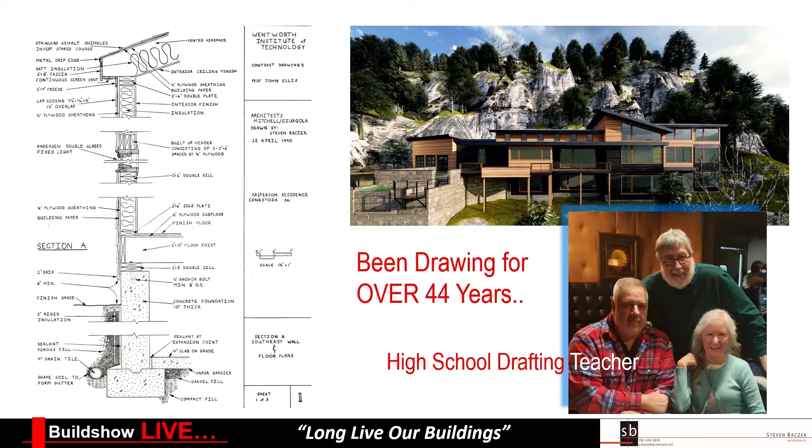So the picture with the 3 people, me being one of them, the gentleman behind me with the glasses on was my drafting teacher in high school. I still have dinner with him once or twice a year. We talk about it, he watches all my videos, he reads the articles, I'll send him a magazine or a link every now and then, but we chat rather regularly. I think it's really important to maintain those links for a number of reasons. He wants to understand what his success is also, right? So by me sharing that information with him, he gets a really quick understanding of who he was and what he did.

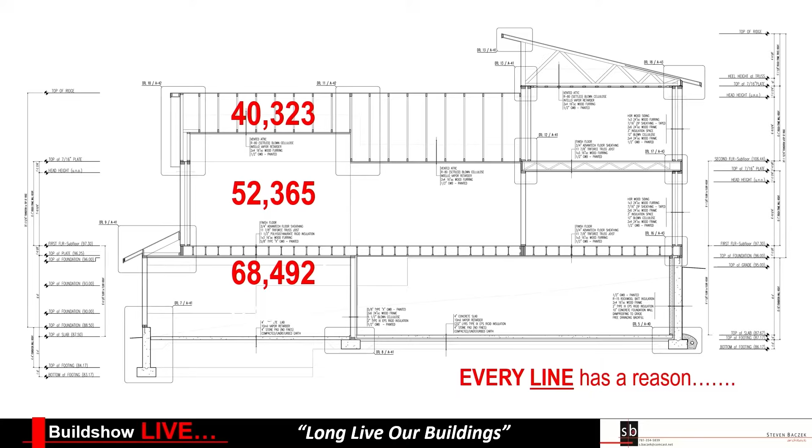Set of drawings - maybe you know it, maybe you don't, but I took 3 projects we're currently working on, did a global grab, and did a count. So 40,000, 52, 68 - those are the number of lines in a drawing set. It's a lot of lines, right? And every line has a reason for being. So as an architect, I certainly need to understand what every line means, but as a builder, you're charged with interpreting what every line means. So our success is only achieved if we both understand what all those lines mean.

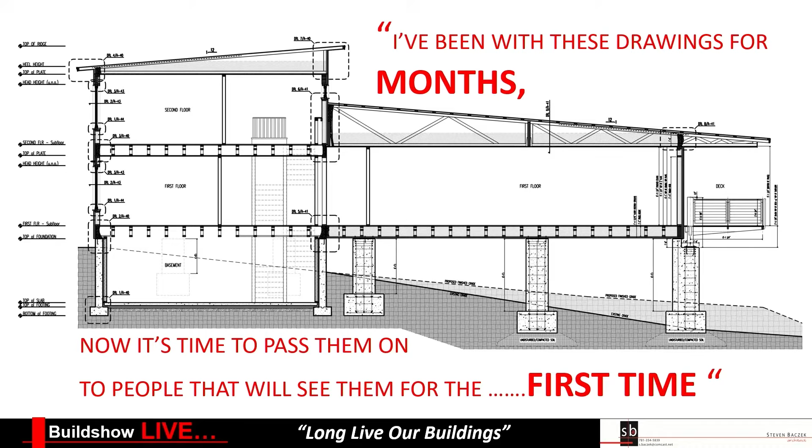One of the things I always have to remind myself is, yeah, I've been with these drawings for a long time. There are drawing sets that, if you ask me the width on that bedroom, I could probably tell you without referencing the drawings, because I was with them for so long. But we hand those out sometimes, not necessarily to the builder, because we love to get the builder on board early, but sometimes the framer's looking at it for the very first time. So we have to make sure the right information is there, so that not only am I putting myself in a position to succeed, but I'm trying to put the framer in a position to succeed, and I'm planting that seed.

And remember, you are responsible. His success is partially my responsibility to provide the right information for him to do his job successfully.

As an architect, one of my favorite things to do is visit the job site. I know that's crazy for an architect, and believe me, I can play games with the best of them out there.

I walked up to a job site where the concrete guy, the foundation guy, was leaning on the fence. I said, hey, how you doing? He said, oh, good. I asked, how'd the foundation go? Everything lay out okay? He said, yeah, it's fine. After a couple seconds, he looked up and said, what are you, the framer?

This is where I had to have some fun. I said no, and just stared at the foundation. He goes, oh, you must be the plumber. I said no. He said, well, are you the excavator? I said no. He said, all right, who the hell are you? I said, I'm the architect. He said, really? Why are you here?

Architects, we get that a lot. But I can't do my job well if I don't know what everybody's job is out there.

So I'll climb up on a roof, sit down, and talk to the framer. Hey, did everything lay out properly? Was all the information you needed there? How do I provide a set of drawings as an architect if I never visit a site and never have a conversation with a concrete guy? How do I know what the hell he needs?

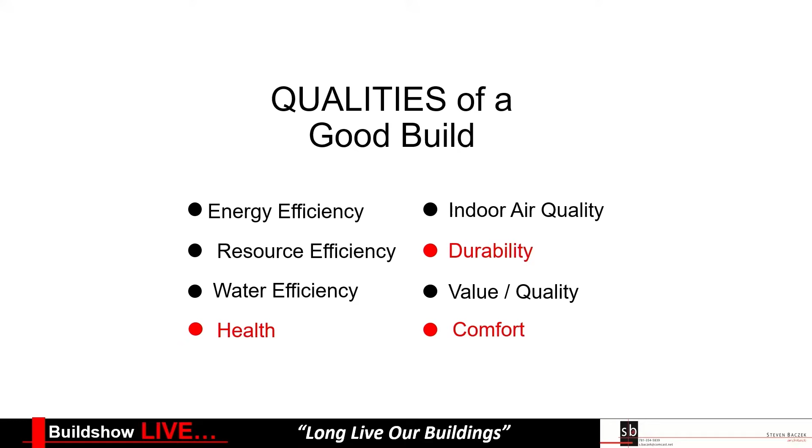So they understand those things. Our job is to find that sweet spot, right? As professionals, how do we get them in that range?

Labels—I hate labels, you can get rid of them for all I care. One of the labels I hate the most is high performance homes, and that's kind of one of the things we specialize in, but I rarely use that term. For me, every home is just a series of decisions. Every home has a budget, and my job as a professional is to marry their budget with good decisions. That's it. If you want to call it a passive house or LEED Platinum or zero energy, go ahead, that's fine. But my job as an architect is to take that budget, marry it with sound decisions, and put the best product on the ground that I can.

In my work, I have the privilege of working with some really interesting people. One gentleman I worked with—we were building a second home that would eventually become his final retirement home and family home. Jay happened to be in charge of entrepreneurship, the College of Entrepreneurship and Innovation for a very prestigious college in New England. Jay spends his time going around the world, when he's not teaching, talking to companies and countries about things like how do I scale.

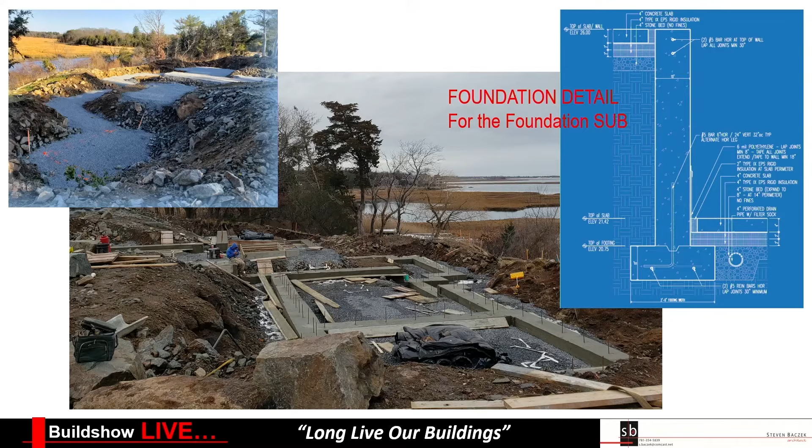And yes, it scared the hell out of me because foundation systems, as you know, we get one chance to get it right. And so we did our typical detail there, and you can see here all the different plateaus of that foundation system.

But because fear is such a great motivator, I said, you know what, let me take the extra step. I'm going to build a 3D model of the drawing. I'm going to build that foundation before we build that foundation, and make sure I thoroughly understand it. Because again, when I look in the mirror in the morning, you are responsible.

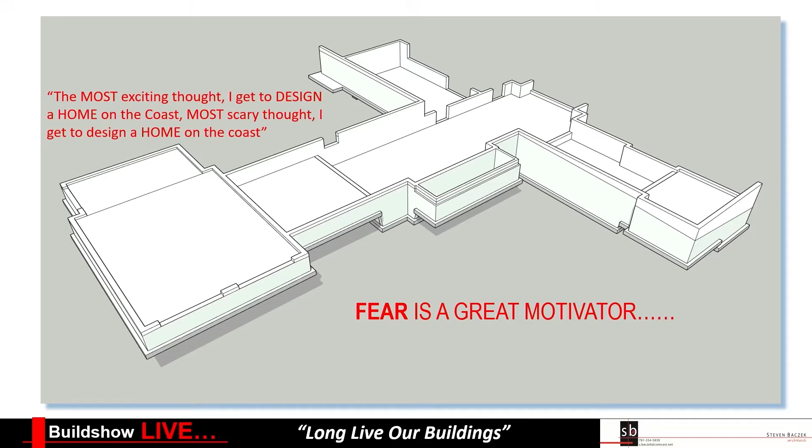When Brian calls me, the 3 words I never want to tell Brian is 'I don't know.' It might be 'I don't have that answer, I'll go find out,' but it's never 'I don't know.' So I built the whole model of this. I understood where all the steps were, where everything went, transferred all of that information into the foundation plan, and you can see that's a blow up of this, with all the little different elevation marks.

One of the things I learned from a concrete guy years ago was, he asked, can you put diagonals on a foundation plan? I said yeah, that literally is 2 clicks and stretch the line on. He said whenever you do foundation plans, put that on there. We could do the math and figure it out, but it's great to have those diagonals to check our square on the foundation, because my number's gonna be within a 32nd, since that's what our tolerances are set up for. So we could provide that number. It helps him become more successful because not only is he doing his job, but he can check it against another number to ensure we're all on the same page.

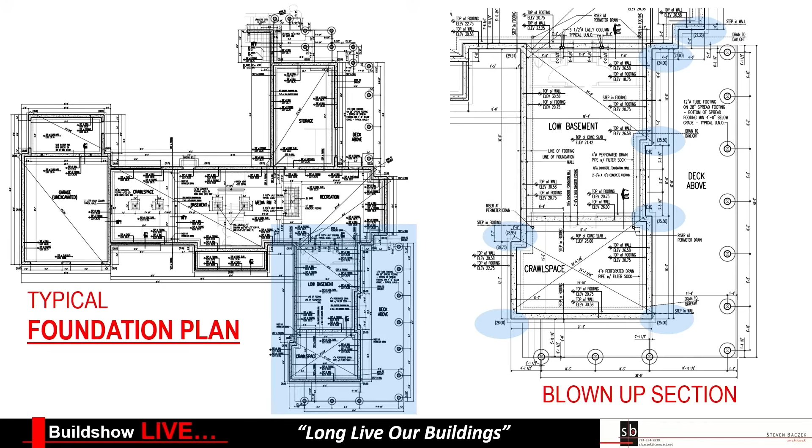And if he puts in a nice square foundation, guess who looks good in front of Brian? So success breeds success. We put all these numbers, but then I got thinking, I built this model, why don't I help Brian out even further? So I created a whole package of 11 by 17 sheets because I already had the information.

I did this so I understood it, but now let me share that information with Brian. I gave him all of the foundation elevations with all the grades, 25, 25.5, 25.5, those are all dialed into the foundation plan, but it also shows what's above grade, what's below grade, and what the heights are of each of those grades at the corners above the footing.

So guess what Brian did? He absolutely loved it. When he built it, he went over there, measured up 4'3", sprayed green on that corner, snapped the line and sprayed green. So not only is Brian now successful, the waterproofing guy's successful too, because how easy of a job is it? 8,000 square foot house, you tell the waterproofing guy, I just sprayed all the green lines, just go and waterproof to the green line.

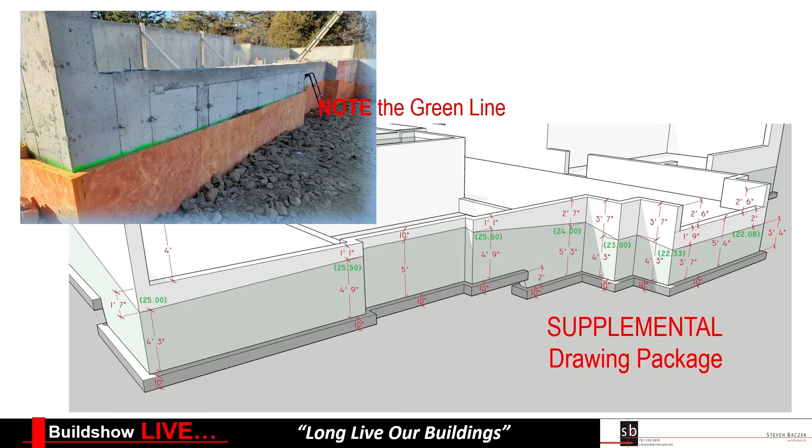Coordination is spot on in that system. Everybody's successful because I chose to make sure I knew what the hell was going on in step 1, and then shared that information with everybody else to ensure success went down the line. And now that that's there, you just tell the excavator, hey, backfill that to about 2-3 inches above the insulation on the outside of the wall, and the excavator's done and happy.

Everybody that followed me from the drawings is happy because they all fully understood. The concrete guy was immensely thankful. He said this is the best foundation I ever put in, and it's one of the most complicated. But it was the easiest because someone took the time to figure it out. Someone took the time to do their job.

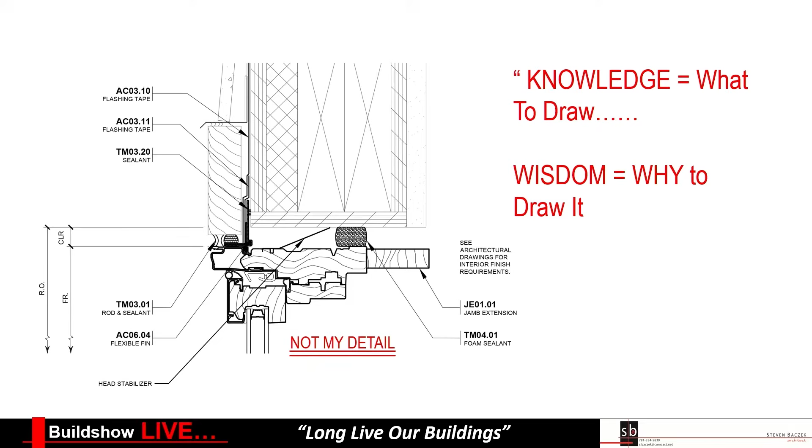Integration and application. A lot of times I hear people say, oh, we'll just wait till that gets framed up and we'll figure that out. You hear those stories with other builders saying the architect really didn't give us room for a mechanical room or mechanical space or duct space.

This is a small 1,500 square foot house. We put a Zehnder system in it. The Zehnder system had 285 linear feet of 3-inch hose. 1,500 square foot house, no basement. That is not a situation where you say, well, let's frame it up and we'll figure out where all 285 feet go, right? That's something we have to figure out at the beginning. So knowledge of what systems we're putting in that house, but also knowledge of where these systems are going to go. It's an integration process, not an application.

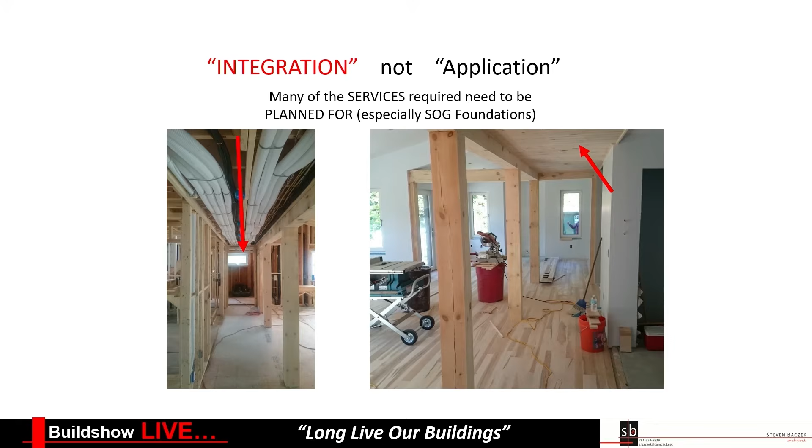It's not something we apply after the fact, because it's not going to happen. And the homeowners don't all of a sudden want to see a soffit running down the left side of their family room because you said, hey, we didn't really realize, but there's 8 3-inch hoses we got to get from over there to down there, so we're just going to put a soffit across the room. So we planned this out. We turned that little hallway there into the basement, basically, ran everything that had to traverse the building, and then we complemented it with a nice wood ceiling. We turned it into an architectural effect that was fully integrated with our mechanical systems.

Pre-construction meetings. I do a lot of work. Jim, the guy with the red hat, he's the first builder I ever worked with. Jim and I have been working together, and we have 2 new projects we're about to start. We've been working together for right around 30 years. Like I said, very first project, Jim and I never raised our voice at each other. We've never had an argument. We've never even had a frustrated talk. Jim's a real gentle guy, but Jim and I are always on the same page.

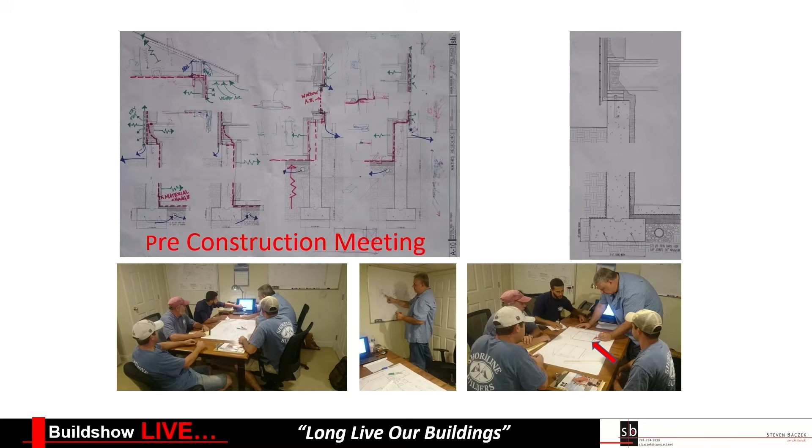I'll give credit to Jim. Jim ensures that we're always on the same page. I try to keep up to Jim, but Jim is relentless about, hey, let's just have a quick meeting, let's talk this through, I want to make sure we're on the same page. But then he doesn't have problems. When I show people this, and I say Jim brought in all his guys, and we walked through the drawings, I stripped all the notes off, we talked about where's the air barrier, where are the proper flashings we're going to put in, people say, well, doesn't that cost Jim money? He's got 4 guys in there for the afternoon, bought him pizza, all of that. Jim's response when I asked him that was, what's the cost to replace 6 windows that were installed wrong? Getting on board and understanding before you do the task is far easier than trying to fix that task gone wrong.

Details. For those of you that were here in 301, we talked a little bit about that, but for the longest time, an architect's job was to show the components of a wall system. Here's the 2x4, this is the floor frame, this is where it all goes, this is the wall, how it's going to set up, this is where the column is, engineered wood column, whatever the case is, how the siding goes. But in my 30 years, things have certainly migrated to where not only do we have to show components, but performance is a major part of what we're illustrating. Where's the air barrier?

How are we managing that water? What's the vapor profile across that wall system look like? Does it have the ability to dry in both directions or in one direction? Is there a problem where I have multiple vapor barriers and I'm going to create a diaper? Joe coined that term. The reason he calls it a diaper is because you know what happens in a diaper, it gets filled with you know what. It's the same with the wall system if it can't dry in at least one direction.

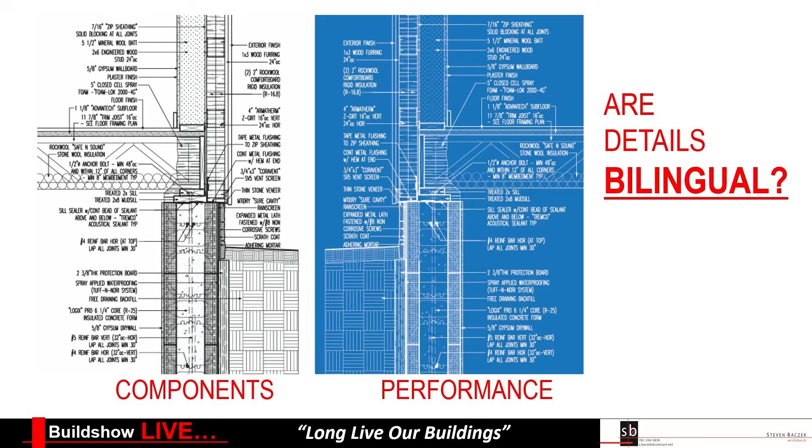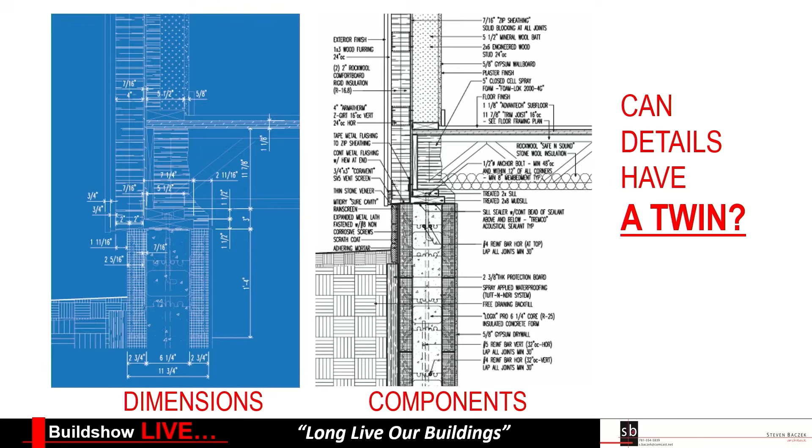Sometimes I do twins. Some builders really like it, there's a couple I work with that absolutely love it. We'll do the detail, put all the notes on, but then I'll provide them a detail that has nothing but every dimension available. They're certainly smart enough to put that together, but they just like that detail there so their guys can check the number, so their framer can check the number and make sure everything is going well. From a CAD standpoint, it's freezing a couple layers, thawing the dimension layer and turning off the text layer, it's not any additional drawing really.

It takes me maybe about 5 minutes to develop that drawing, but that's hours worth of potential savings and corrections for the framer and the general contractor, if we're talking about performance, and I know the framer is in charge of getting my air barrier correct.

Then I do a set of twins where I focus on what the air barrier is, because after all this stuff on the right gets installed, the framer's gone. He doesn't care that there's a crown molding here or a beadboard soffit or vent here, he's not putting that in. The siding guy that's coming is putting that in. To the framer, who cares after I leave?

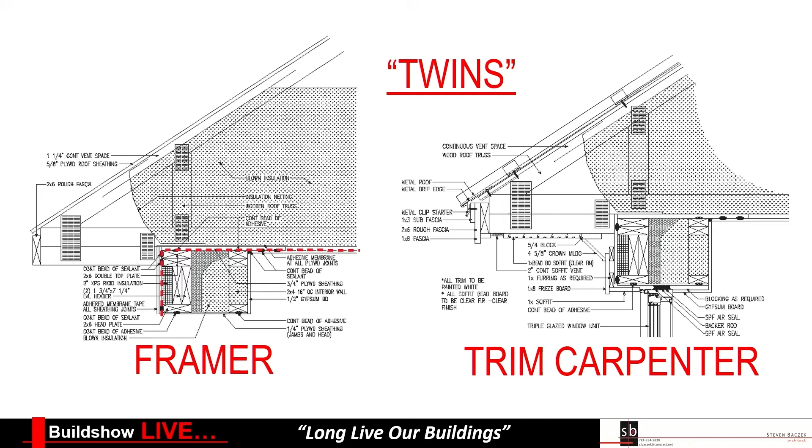But the framer does care about how we're transitioning that air barrier across and into the ceiling, where do I have beads of sealant, right? That information. So I create twins that are for each of the different disciplines so that they can be put in a position to succeed.

Design intent versus build. Now, all of our drawings, if we do trusses, yes, they get sent out, they get engineered, we get tons of shop drawings back, we get to review them, but how many people have ever sent plans to a truss manufacturer, come back with shop drawings and had no changes?

That world doesn't exist. They always come back and it's like, why is this truss 26 feet? The house is 24 feet. Oh yeah, we must have missed that. And I guess you did.

So what I like to do, and again, all of this stems from someone has to be in charge of the building, and I'll take that responsibility. Whether it's the truss manufacturer, the framer, the concrete guy, I'll take the responsibility of understanding the build from day one till the end of the project, and then I'll have those conversations in between with all the various disciplines.

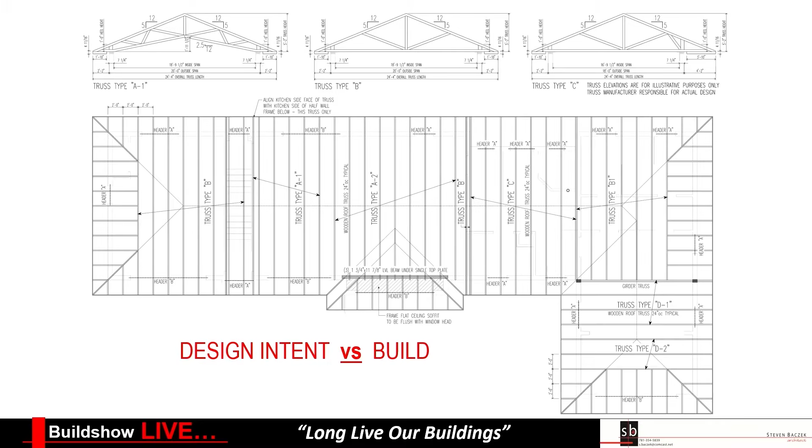So my conversation with the truss company is, I do the roof framing plan, I lay this out, but then I call out truss A1, A2, Bs, Cs, and then I'll just do some truss elevations. Now, I'm not engineering the truss, that's not my intent. My intent is to get them to understand what the overhang situation looks like, what the slope is, what I intend the height to be, and here's the bearing points of those various trusses and where they lay out in the building. I'm just giving them my design intent via a truss elevation.

So now they look like even more of a fool when they come back and this truss, instead of 24, is 26 feet. I say, I drew the elevation for you and it says 24 feet. How did we get there?

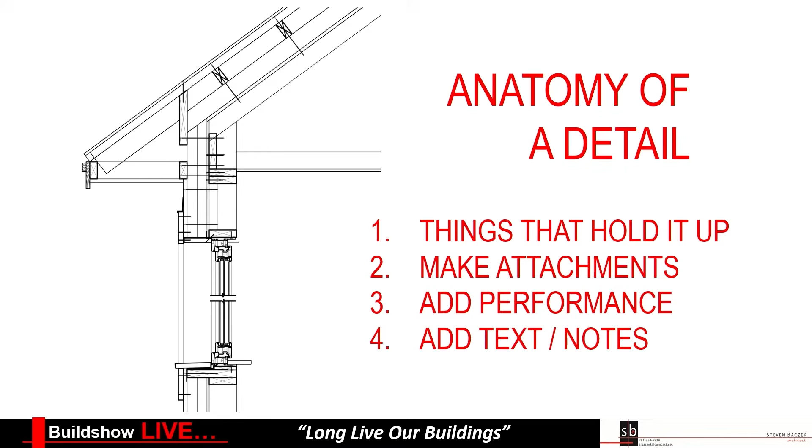Anatomy of a detail. When we sit down and talk about what makes a good detail, well, obviously it has to hold things up. We don't want our buildings falling down. We have to ensure we can make the proper attachments. How is this going to attach to that? What's the performance on that wall section? And then, what are the notes and how do I illustrate the performance and building metrics for that detail?

For me, all details should be recognizable, functional, and executable. Recognizable - I see so many architects draw details and I'm like, oh my God, why are you trying to reinvent the wheel? One of my favorite Joe quotes is, it's not rocket science, it's building science.

Dumb it down as simple as you can get. Some of my drawings, people are like, oh, you shot another video about that detail again? Yeah, that detail works. It's recognizable, it's functional, and it's executable. Builders understand it, it performs exceptionally well, and they can build it real easy. So yeah, we use that detail.

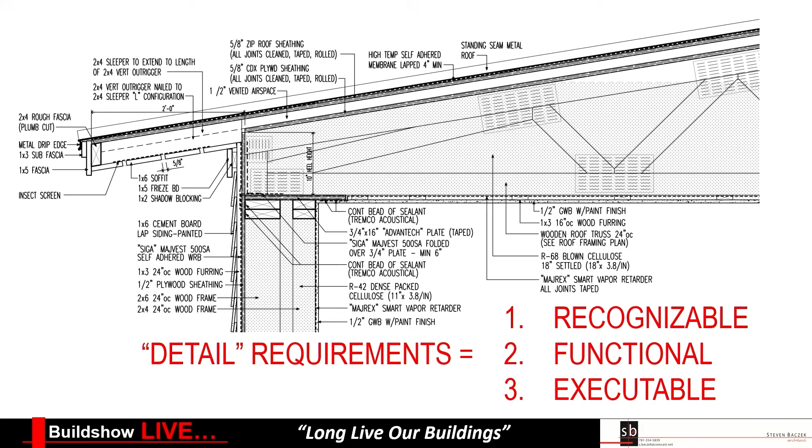Recognizable. At first glance, this might look like a complicated detail. It's a timber frame structure, passive house inspired, with a double wall, perfect wall, air barrier, vapor barrier in the middle of the double wall, two 2x4 walls with a 4 3/8 inch space, a SIPS panel on top of the timber frame that ends with a 2x6 outrigger, and soffit with an over-vented roof assembly on top. Now that's a bunch of gobbledygook to make it sound like this is a very complicated detail.

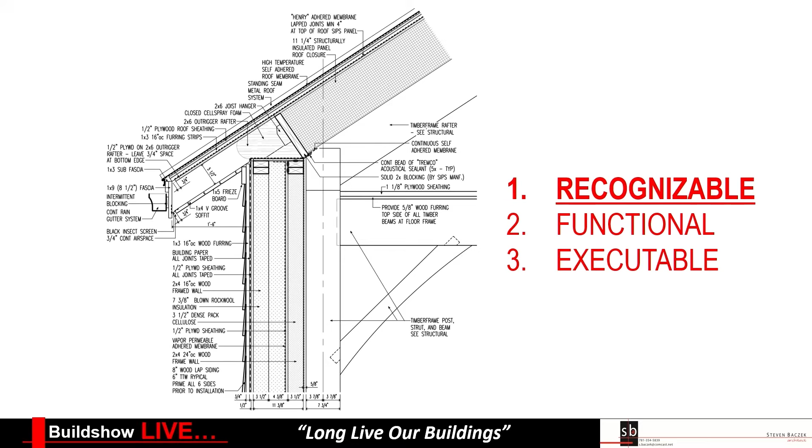But when you look at it, there is nothing about this detail that most framers don't do on a regular basis. Yeah, it's 2 walls instead of 1, but it's a 2x4 wall. It's a vented roof, a lot like any vented roof. SIPS panels, timber frame, those are the exceptions, but all this other stuff is fairly recognizable.

Functional. This is a detail where we do a slab, put 4 inches of rigid insulation on top of it, 2 layers of Advantech in opposing directions, and basically have an 1.5-inch raft of Advantech that floats on top of that foam. Highly functional.

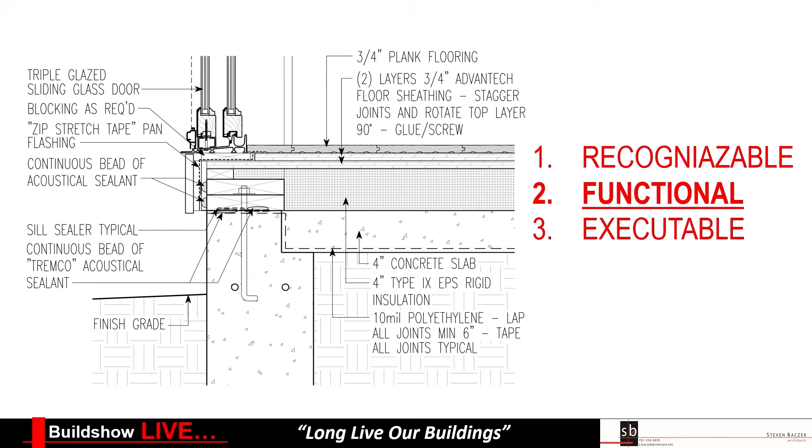Continuity, which is one of the most favored words in the building science world - this is full continuity. This was from a 3,500 square foot house that had 3,500 square feet of insulation over the slab. But also notice, by doing the 2 layers of Advantech, I was able to pull this one back and create a nice sill pan for my sliders. So I'm getting water management out of that detail, which makes this detail highly functional, because it's solving for the thermal issue here and for water management issues here.

And I fur this out, that band there, and water can just drip down and go out. Highly functional detail. And it can be executable. This is a 3-piece pour. This is with Jake - they dig a 16-inch trench and just fill it with concrete. We can't do that in Massachusetts, which is unbelievable. Some places still do it, but we can't use ground for form work. Our code doesn't allow it.

But in Texas, you can just dig a trench, fill it with concrete, call it a footing. And we do. But this was a house where we had our 4-inch concrete slab and the homeowners wanted it finished, so we had to come up with the details. We didn't want to lose the financial efficiency of digging the trench. So we dug the trench, had some rebar coming up, and poured this curb. But the thing that makes this executable is this 2 inches. When I worked out the detail with Jake, we set that up for 2 inches.

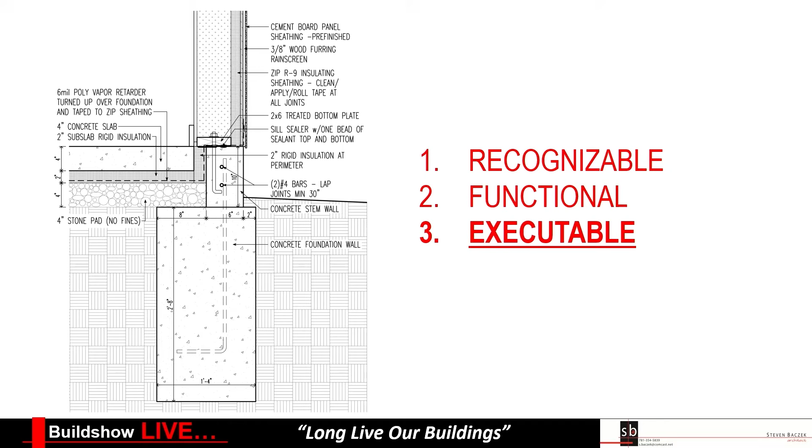Anybody want to take a guess why? If you were listening to us yesterday, you know why, because I showed it. It's to put a 2x there. So we put a 2x there, and that allows us to form it up. Then when they peel the 2x away, you just simply bury that little ledge in the detail. And then that allows us to come and insulate and pour our slab up to there and get our nice clean slab finish detail.

One of the things I like to do personally is even structural stuff. We draw most of it for a lot of our projects. Occasionally, like in Colorado, we have a structural engineer, and down south we have one. But definitely in Massachusetts, I draw everything up, send it to my structural engineer, he marks it up, and then I edit my notes on the drawing.

One of the benefits of that is because I draw it, I think about it. This is a project that Jake and I did, that cantilevered deck system out at the Hilltop Aero project. The structural engineer sent back his sketches, and he had two 7x4x3/8 angles welded together. Because I drew it as a single line, I was thinking, okay, there's two little round edges - that's gonna hold water and eventually rust, and over time we have a durability issue there.

What if we take those two angles and spread them apart? 3/8 inch space with plate spacers at 24 inches. So I called the structural engineer and said, hey, I want to take those two angles, split them, put a 3/8 inch space in there and allow the water to drain. He said, yeah, that doesn't really change anything. And that's how we drew it up, and that's in fact how we built it, so now we have that drainable space in between that's not going to hold water.

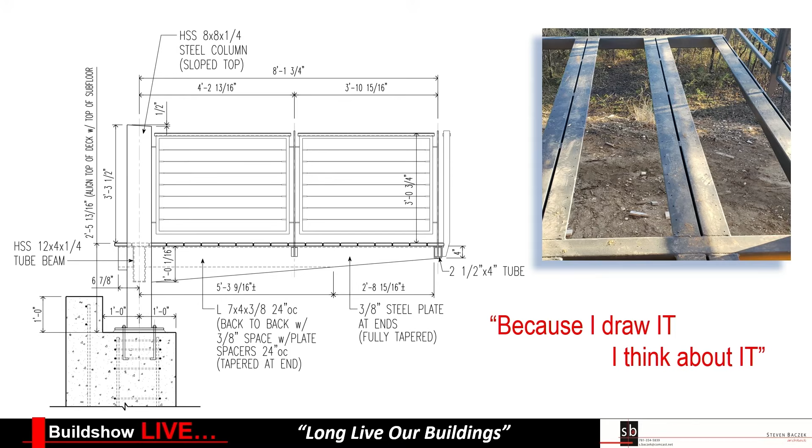So Jake and I are providing our clients the very best in solutions, working with our structural engineer. It's certainly a team effort, and it should perform as good as it looks.

Doing all these drawings so the steel fabricator understands where all the rods and cables go and how the top is going to attach - basically do your job. And the steel fabricator said, how about if I just build this in my shop, we rent a crane for the morning, truck it out there on a trailer, lift it, and drop it in place. It was only 8 bolts - they set that whole deck system in about an hour.

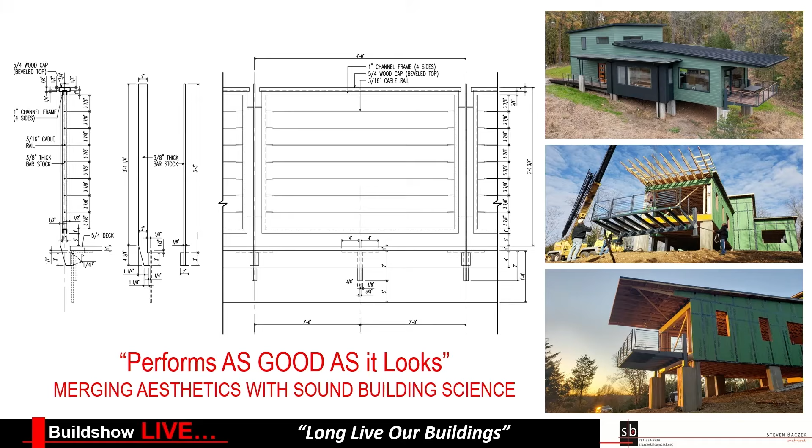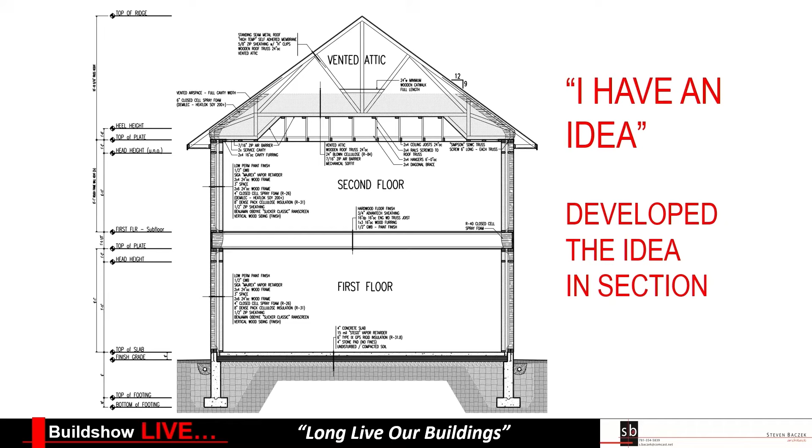Sometimes I have an idea - sometimes they're good, sometimes maybe not so good. But anyways, I had this idea: passive house, slab on grade, we needed a basement. We don't have a basement, so I said, okay, how about if we manufacture an attic? We always want to keep our HVAC systems on the inside of the building, so let's create that manufactured attic.

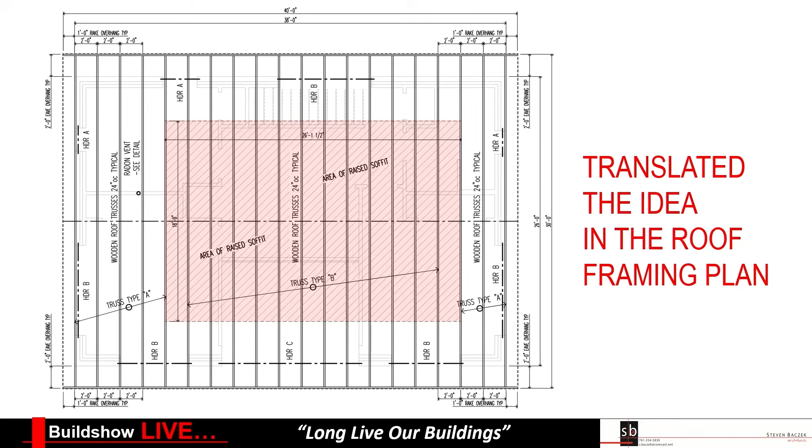Let's develop that idea and translate it to the roof framing plan - truss type B, these are different trusses than truss type A. Notice the highlighted area touches every room on the second floor, which is important from an HVAC perspective and from a Zehnder perspective, because we want to get those ports into every room. So I need to make sure we hit every room. There you go - truss A and B.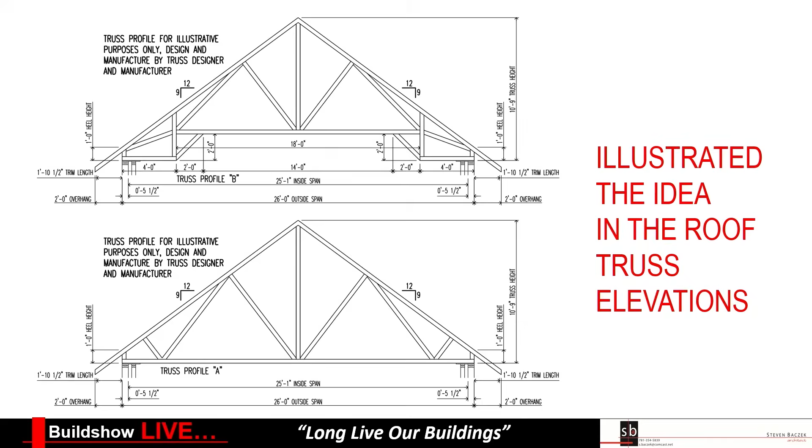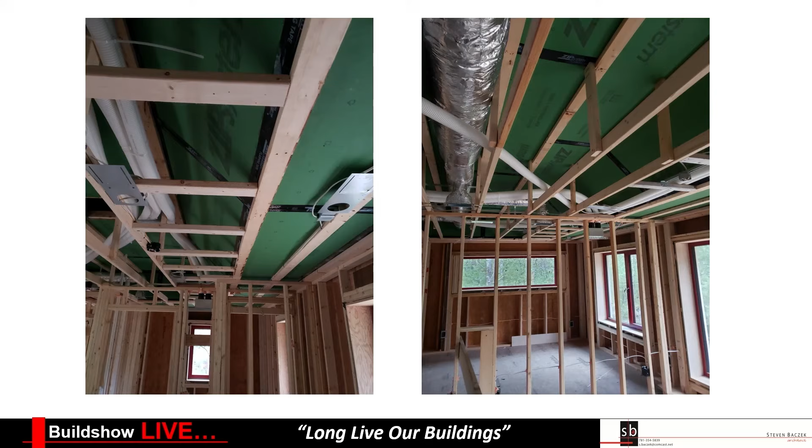We have the manufactured attic there, and on the ends we don't have the manufactured attic, so now our truss company knows what my intentions are. Then we finalize that detail and created this 2-foot attic, which now gets filled up with a whole bunch of HVAC stuff. These ideas migrate down, and success breeds success.

My first passive house was pretty interesting because I met with this client - a builder actually brought me to it, and it wasn't even the builder building the house, just a builder I knew. I met the homeowner and we're sitting there having a meeting. This is 2009 - I didn't know what passive house was, but I sat across the table from a guy who said, yeah, I want to build a passive house, are you familiar with that? Oh, yeah. And then I excused myself - I was in the bathroom Googling passive house.

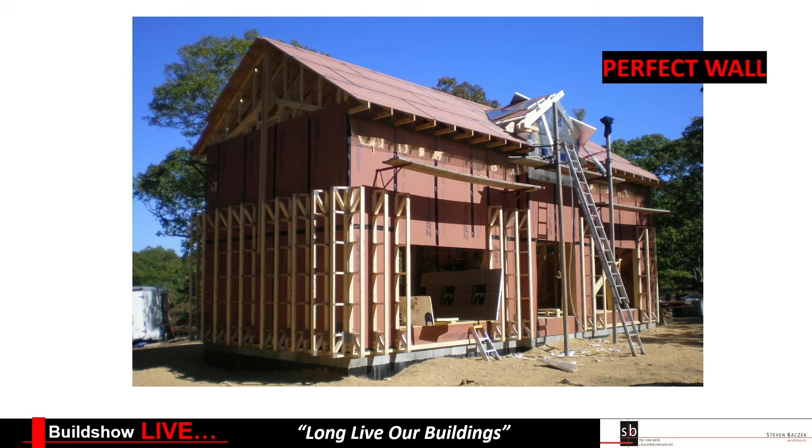So I walked out and said, Farley, we just have to figure out a way to build an R70 wall outside of the foundation and hang it. So we hung 14-inch floor trusses on the outside of the building and basically put a heavily insulated sweater around the building.

Another passive house, this one we actually took to zero energy. That was upon completion, notice no PV panels, but we've since put them on there. Dan Roy, I've talked about him, he has the best retirement plan in America. He's a retired engineer who lives in a passive house with superb air quality and energy efficiency.

Some transfers too, he's paid over $2,000 of his sister-in-law's electric bill with his PV system. In Massachusetts, utility companies are required to allow deferment, so if I make more electricity than I use, I can start paying my neighbor's bill with the excess I create. He defers that to his sister-in-law who lives on the same grid, and that's where that $2,000 comes from.

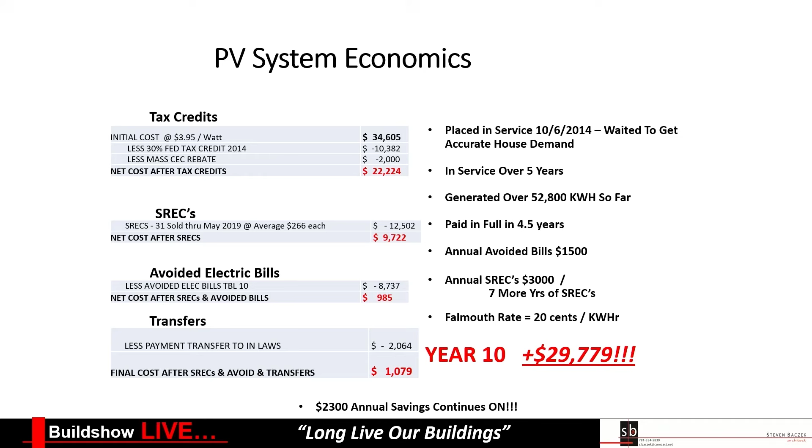So after all of that, it ends up costing him about $1,000. The system was in place for about 5 years, totally paid for itself in 4.5 years. At year 10, and we're probably at year 12-ish now, Dan's made over $30,000 in year 10 on that house. He lives in a passive house with superb energy efficiency and air quality, and he's basically getting paid to live there. Oh, and by the way, he actually runs 2 cars off his house and drives around on that. So like I said, best retirement plan I know of, because Dan pretty much gets paid to exist.

As long as the sun comes up on his house, 57% of his heating requirements for the house come from the sun rising, and he gets paid for it.

So he only has to come up with 43% of what his heating bill is to create success. Another one, this was Rhode Island's first passive house. The homeowner was so excited, he sent me his electric bill. It says $0. And that was his first bill. Guess what his 100th bill says? $0. Guess what every bill said? $0. Craig never pays anything to National Grid. In fact, National Grid pays him to live in that house.

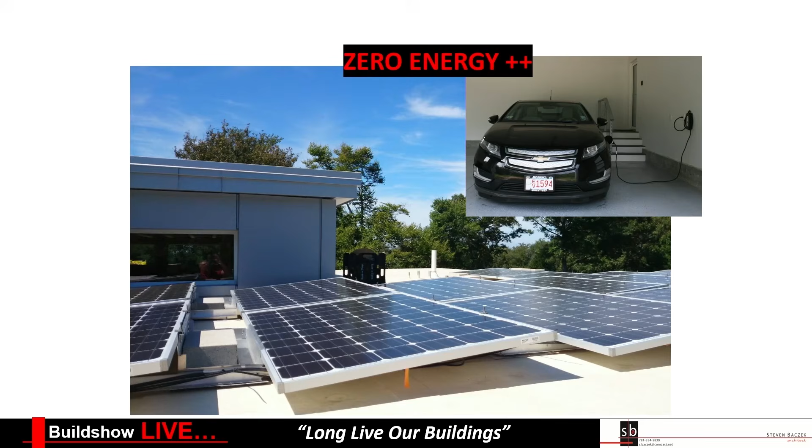And even if you have flat roofs, we've taken flat roofs and put low profile systems on there. We charge cars on those. We have battery systems in the basement for backup. $0. They never pay any energy bills, and they get to drive around town and go to work on their house.

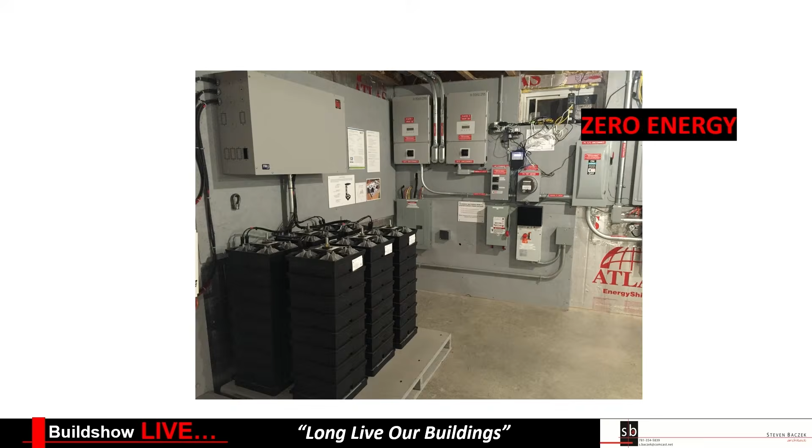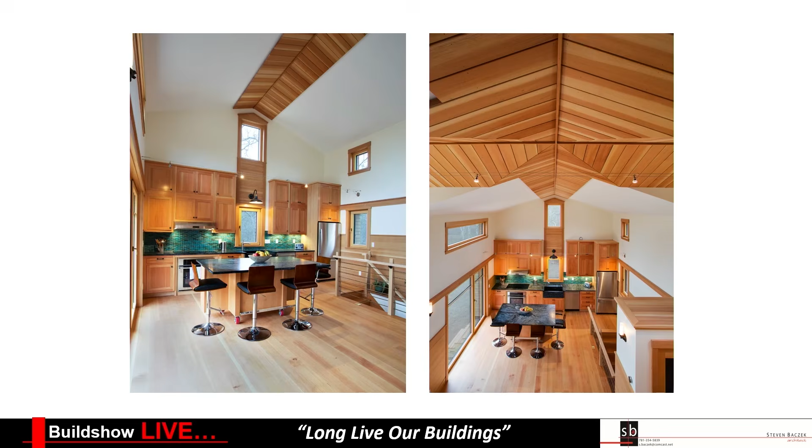All right, that's Farley's house. That's that 800 square foot house with the trusses on the outside. It should look as good as it performs. That's passive house quality and performance, and I think it looks pretty good. Doesn't have to be a tool shed just because we made it energy efficient.

So let's talk a little bit about how I got up on the stage. One of the things I love to do, and never pass up, is going out to see where things are going. I'm sure you've seen videos of me at Nu-Wool or Roseburg, seeing logs get cut, seeing insulation get made, traveling with Peter Yost, and I love listening to the conversations, especially when he's in the lab talking to the lab techs and asking them questions. It's a priceless conversation to listen in on, getting that information out there.

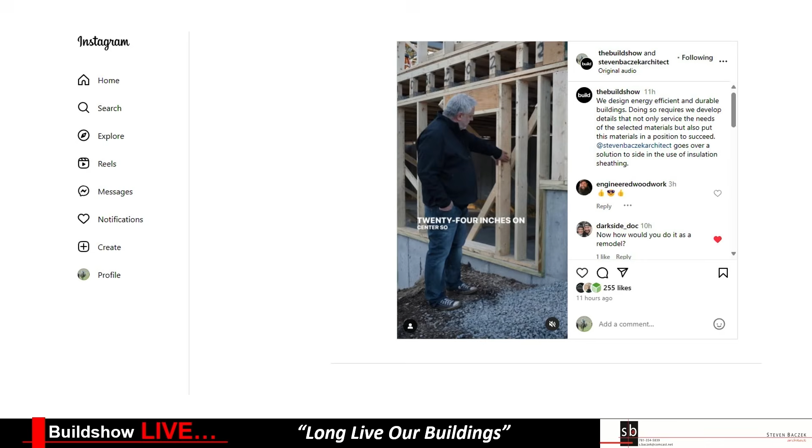Is everybody here on social media? Now, I'm not going to tell you that you have to go on it, but I am going to tell you that it's a huge boost. If you want people to know who you are as a builder and how great of a job you're doing, where do you think they get that information? If you post something and somebody says, oh wow, that's a great detail, that looks awesome, that looks beautiful, homeowners start to take notice.

And I ask a lot of my clients. I have CEOs of very large corporations, owners of very large corporations, that follow me on Instagram and LinkedIn. You don't think it is because it's some obscure scribble of a handle. It certainly doesn't say CEO of such and such, but they're out there watching. And if you want to build those caliber of houses, you have to get out to the people that are trying to figure out, hey, who's a really good builder? Who's a good architect? Who's somebody that's aligning with my thinking? You need to put that information out there.

Instagram, LinkedIn, I put it out there. There's a lot of CEOs when I ask them, oh yeah, I follow you on LinkedIn, and then I go watch your videos. Of course, the Build Show and YouTube, we have a YouTube channel. People go there and watch.

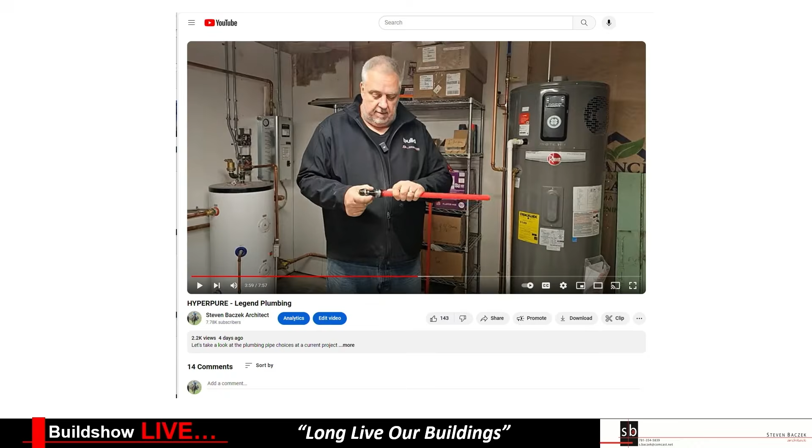And Build Show, I'll leave you with this one. When you think about, okay, social media, Steve, yeah, maybe it does something. Anybody want to guess how many views I get a month on my Build Show videos? Because we get the metrics back. I get about 300,000 views a month on my videos. What's that translate to? 10,000 a day? Is that right? Yeah, 10,000 people are watching my videos every day.

Yeah, thank you, I appreciate that. But the reality is the world is watching. You need to give them something to watch. If you're successful and you want to be more successful, you have to put that success out there for them to see it and for them to appreciate it, and then they'll call you. And then you're starting to be like Jake. People are calling you saying, I want you to build my house. It's not up for bid. It's not up for discussion. Tell me what we need to do to get you to build this house.